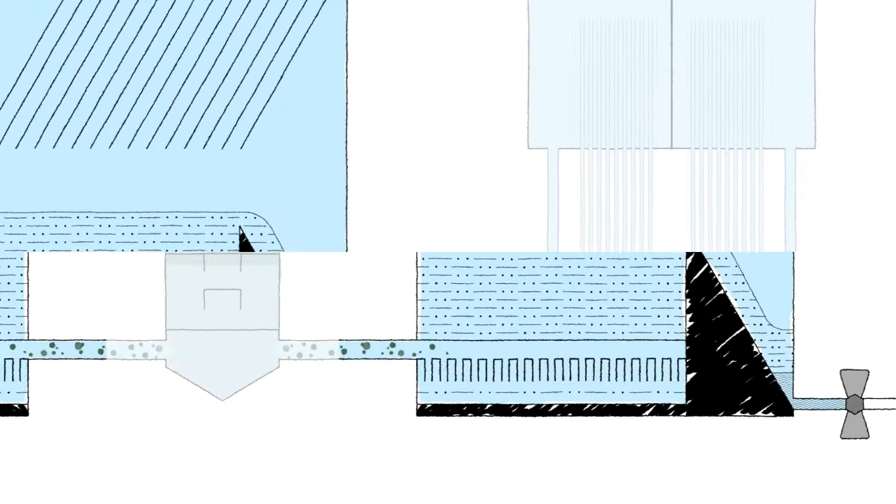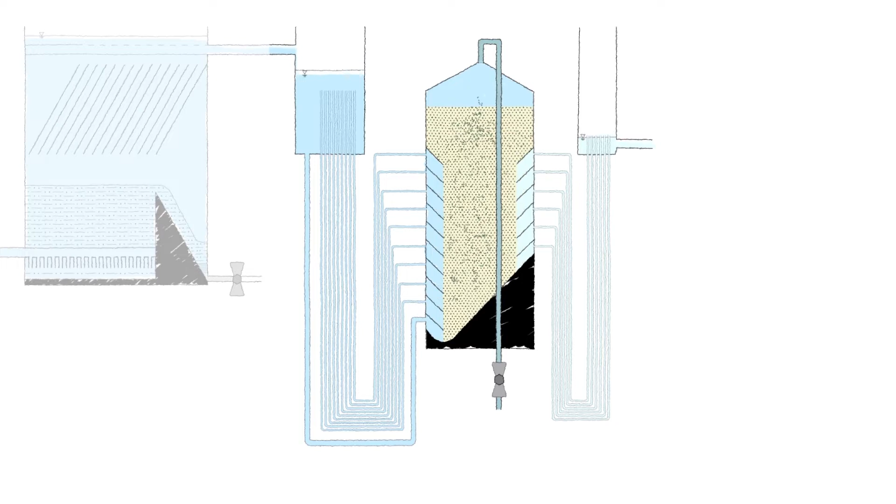First Water Technology is developing a high-efficiency system for drinking water treatment that, compared to conventional setups of the same size, allows for greater throughputs while decreasing the volume of produced waste and limiting maintenance requirements. Unlike other technologies which rely on costly and high-maintenance mechanization and advancement in material science for process improvement, our core technology is based on fluid mechanics and flow channel geometry. With our product, utilities will have access to a robust, low-footprint water treatment solution that is high-efficient and requires less energy than existing alternatives.

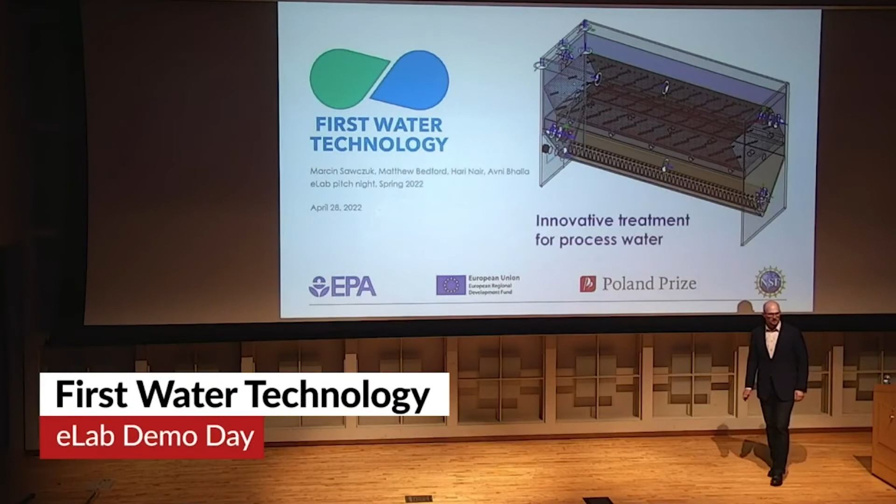My name is Marcin. I am a PhD candidate in environmental engineering and the co-founder of First Water Technology. We are offering innovative solutions for the field of industrial process water.

The problem we are solving results from the fact that most of the manufacturing facilities in Poland, where I come from, are configured to rely on wells as the source of their process water. By process water, I mean everything from cooling to washing cars and conveyor belts. Recent changes in EU regulations mean that the use of well water is restricted, so de facto they are protecting well water for human consumption.

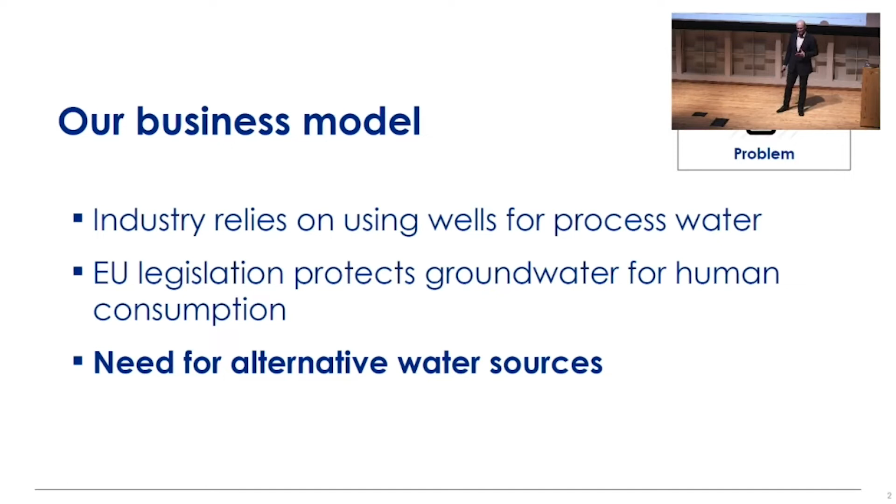As a result of that, all those facilities will lose their permits to draw water and are currently seeking alternative water sources. Our idea is to propose surface water, so resources like ponds and creeks, as an alternative sustainable water source. Due to the lower quality of such water, it requires different treatment than well water.

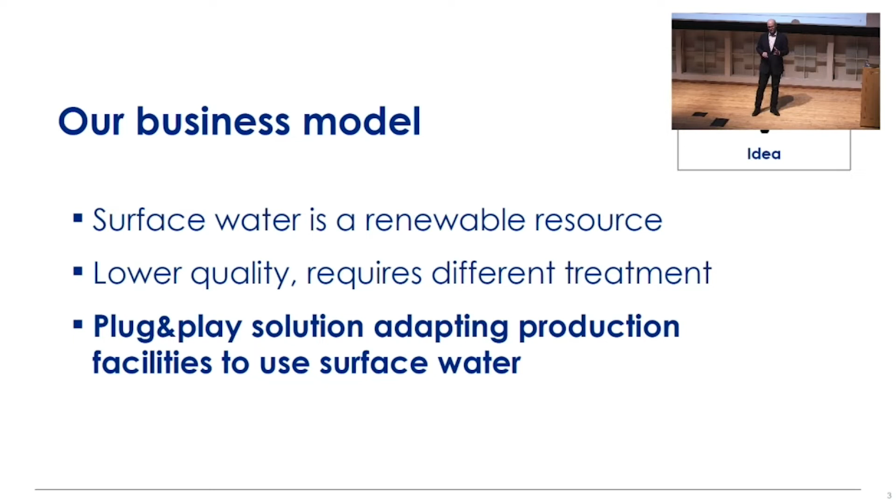If the facility was to simply shift to surface water, a process which is configured to operate on well water will typically malfunction. We will propose to our clients a plug-and-play solution which will be placed upstream from their existing process and therefore will allow for easy conversion of the already existing system to the use of sustainable surface water without the risk of malfunctioning.

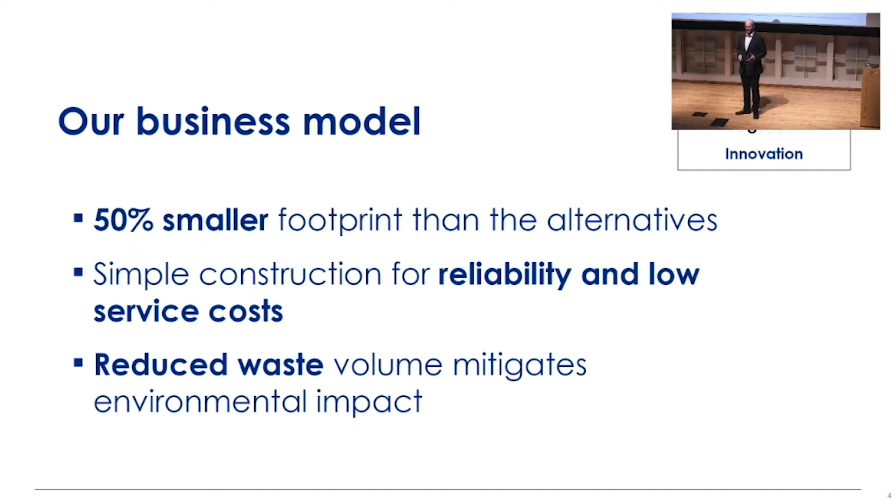The advantages of our technology lie both in the CapEx - it is more than 50% smaller than the alternatives present in the market, which means that the cost of construction is smaller, the use of area is smaller - and in the OpEx, because of its simple construction, the service cost is much lower and the reliability is much higher. Besides that, our systems generate less waste than the available alternatives, mitigating environmental impact and further improving the economic balance of the operation.

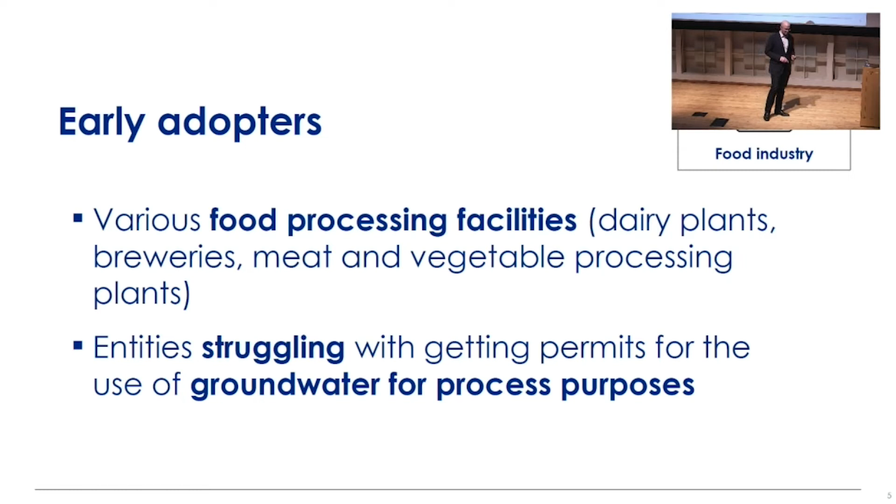Our expected early adopters of our technology will be food processing facilities in Poland and in the entire EU, especially the ones which currently have problems securing permits for drawing well water for their process applications. The reason why we are targeting the food industry is because, first of all, it is a very big sector in Central Europe, and besides that, we have a lot of connections in this particular field.

We are projecting that average revenue per single transaction will be approximately $100,000, and the total size of our early adopter market only in Poland will be $500 million. We are also projecting that we will grow very rapidly because of the EU legislation becoming more and more stringent.

As the next steps, we will probably approach other branches of industry, water-intensive industries such as petrochemical or paper, as they are facing the same problems as the food industry. However, we don't have such a strong established network with these branches of the industry. We will also approach utilities, especially in the US, where small water systems have severe problems complying with water quality requirements.

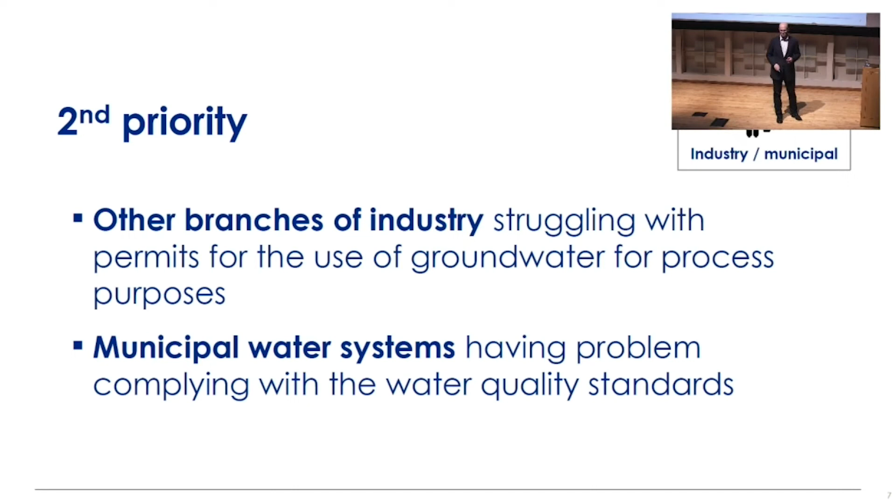Globally, our total addressable market is evaluated at approximately $200 billion, both for water and wastewater. So the opportunity is huge, and there is a lot of work to do in that sector.

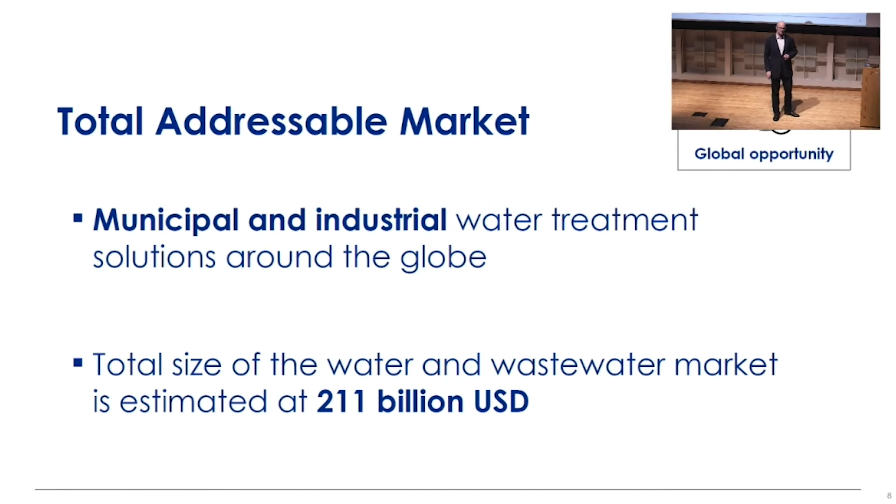We believe that we are the best team to do that work. We are an experienced team combining competence in the areas of technology, legal, and business. And we believe that we are the ones who should work on that project.

For the next steps, we have recently secured a letter of intent with the distributor of our solutions in Poland, and we are currently working on the structural design of the MVP. We also applied for federal funding here in the US, and we secured a technology transfer grant from the European Union Regional Development Fund. They will provide us with $75,000 for opening a subsidiary of our company in Poland and for testing our technology. We'll conduct a 10-month technology validation with one of the main utilities in Poland, and after that period, we will be ready to launch our solutions to the market.